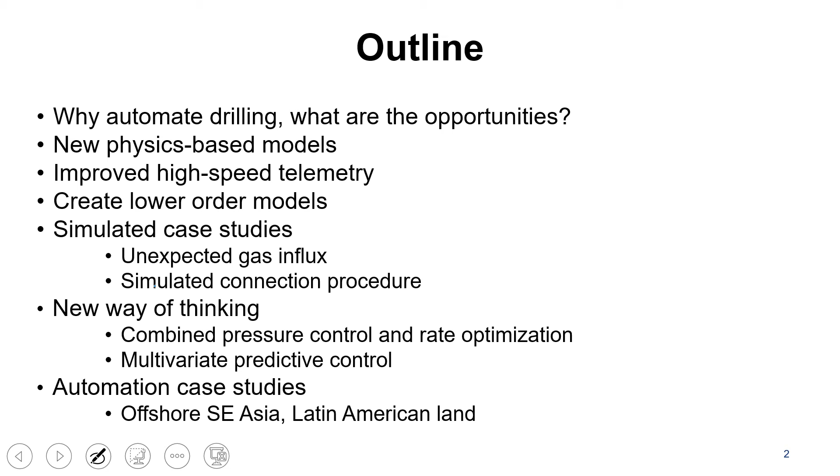So first of all, why automate drilling? What are the opportunities? We're going to talk about some new physics-based models and also improved high-speed telemetry, such as wired drill pipe or other methods to access downhole data. We're also going to review lower-order models and some progress there, since sometimes the large models can't be used directly. We'll go over a couple of simulation studies and then talk about a new way of thinking, combining pressure control and rate optimization. We'll also talk about multivariate predictive control, a more advanced topic, and then a couple of automation case studies: offshore Southeast Asia and Latin American land.

So first of all, why automate drilling? The benefits of automating drilling are, first of all, health, safety, and environment: faster response to problems. You take a light touch versus a major response, such as closing in the well when there's a big problem like a gas influx. There are economic benefits as well—you can operate closer to constraints, and there's shorter drilling time, especially with challenging market conditions that currently exist. We have an opportunity to drill faster.

The other reason this continues to be a problem, even after the BP Macondo well blowout, is that there continue to be about an average of 4 uncontrolled well situations in the Gulf of Mexico each year, as reported in these studies. So we're still having some of those same issues—maybe not quite the same results—but some of these uncontrolled well situations are still happening.

We also want to talk about the benefits of advanced control—having computers adjust valve positions, pumps, and chokes.

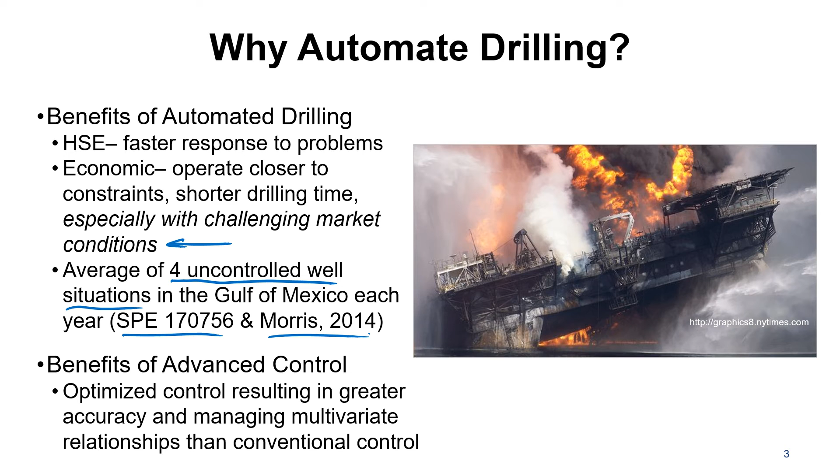Okay, so first of all, what are the opportunities? What's changed in the last couple of years? I'll suggest 3 things that have changed. The first one is high fidelity modeling, indicated by one thing coming into this funnel. We have some very good wellbore hydraulic models and also drillstring dynamic models that have been developed over the last few years and validated with drilling data.

The next is optimization algorithms—being able to solve these models faster and optimize them. With some of the optimization benchmarks, we've seen that problems we could solve 15 years ago, we can now solve 1,000,000 times faster, due to software and hardware improvements.

The third thing we're going to talk about is high-speed drill string telemetry, the ability to measure what's actually going on downhole. We can do that with wired drill pipe, and also with advancements in sensors that are placed downhole.

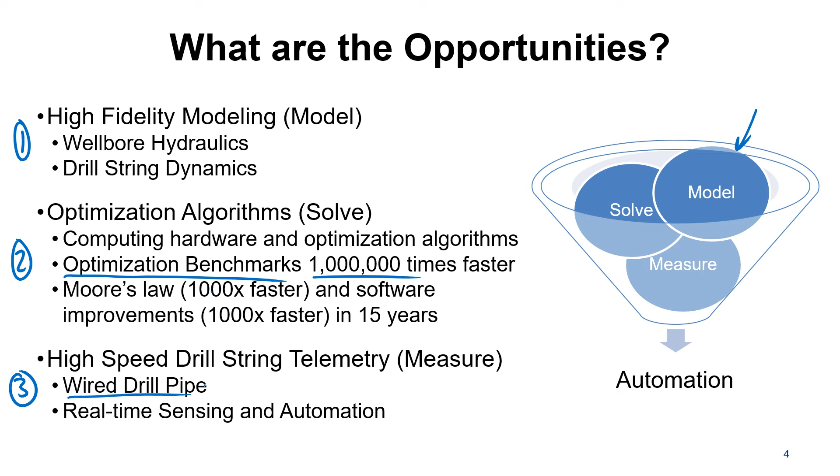Okay, so first of all, the need for physics-based models. There are a lot of reasons why you might want to develop or employ physics-based models in your organization—everything from planning to training scenarios, operations, or after-action review. What we're going to be talking about here is more in the center: well control and rate of penetration, being able to control pressure and also maximize rate of penetration.

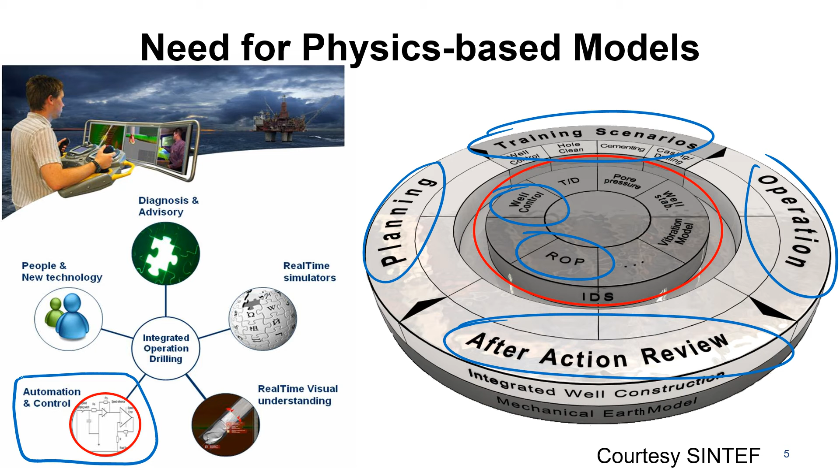Okay, so automation and control is one of the reasons for doing this. And although I'm focusing on this today, there are many other reasons why you'd want to have a fit-for-purpose simulator for drilling operations. So let's talk about advances in some of these physics-based models.

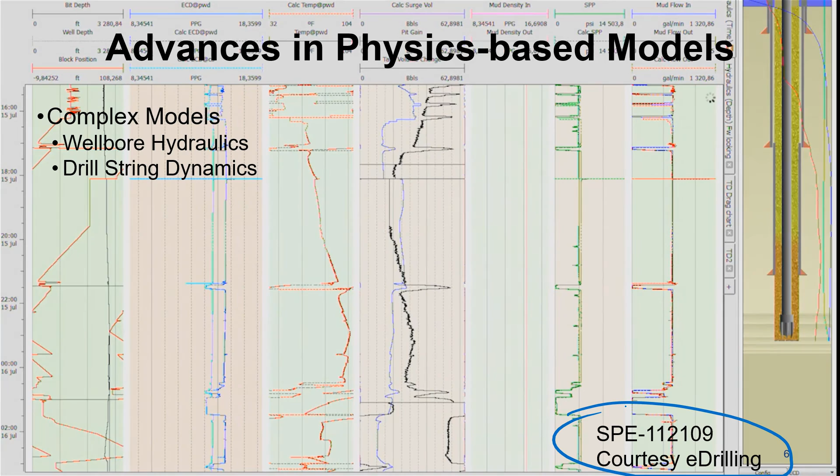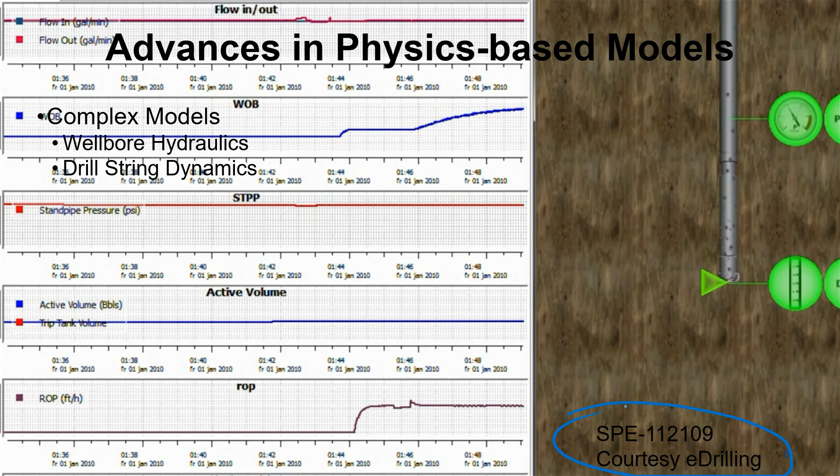Many of the advances have happened with complex models in wellbore hydraulics and drill string dynamics. There's a publication here you can look to for further information. But basically, the bottom line is, if we can reproduce a lot of these drilling scenarios with simulators, those who have spent a lot of time drilling agree that the fidelity of the simulators is getting better.

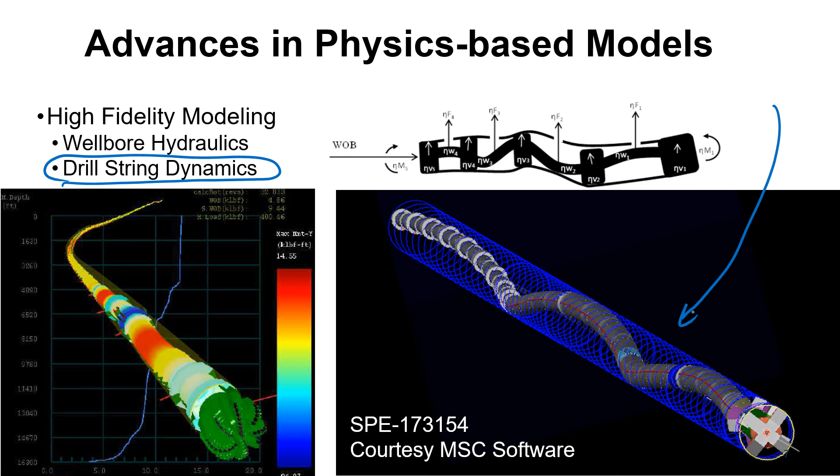We also have drill string dynamic models as well, so this slide highlights that. You can see a stiff string right here, where there's interaction between the string and the wellbore. You can see some backward whirl developing here in simulation as it proceeds. So we can simulate some of these vibration modes that happen in practice, like whirl or other types of events.

Okay, so simulators have advanced quite a bit in the last couple of years, but sometimes the simulators don't exactly represent what's happening downhole, and so there are many times where we need to, or want to, measure what's happening downhole.

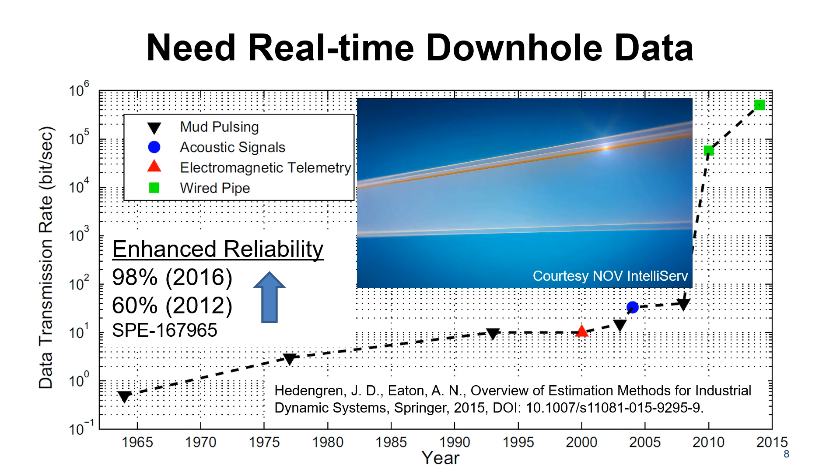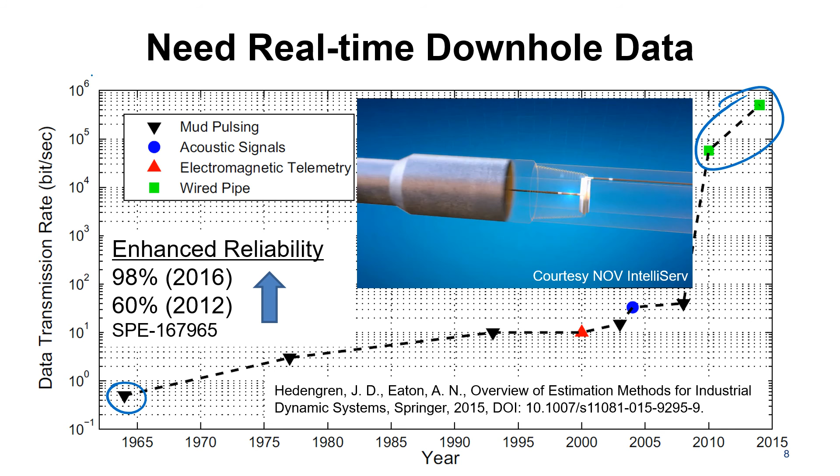That's where wired drill pipe and its advances have come in. We can see wired drill pipe is up here in terms of data transmission rates, on a log scale. Mud pulse technology has improved over the years through data compression and other things, along with electromagnetic telemetry and acoustic signals. It's really just been within the last couple of years that there's been this step change, an orders of magnitude improvement in data transmission rates.

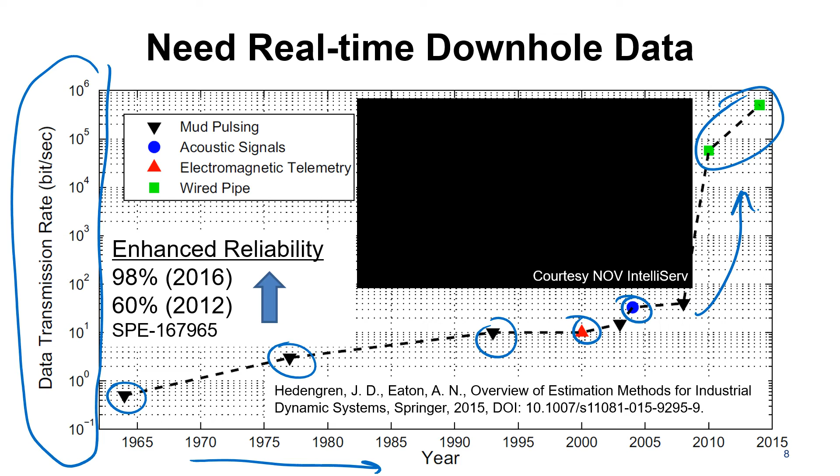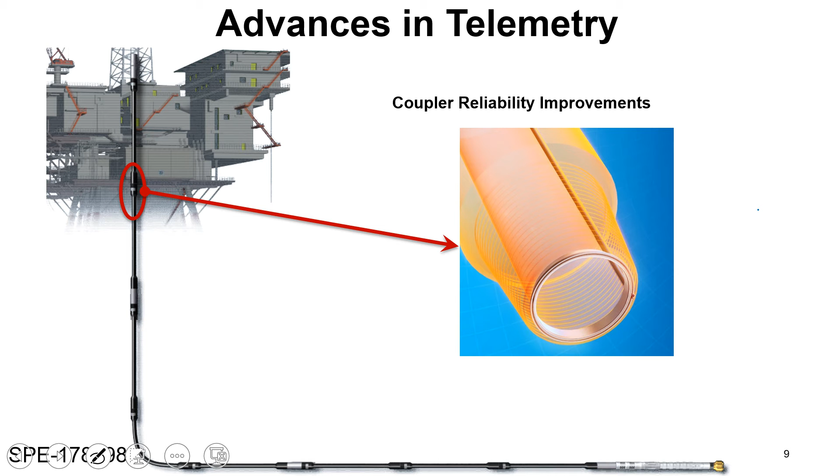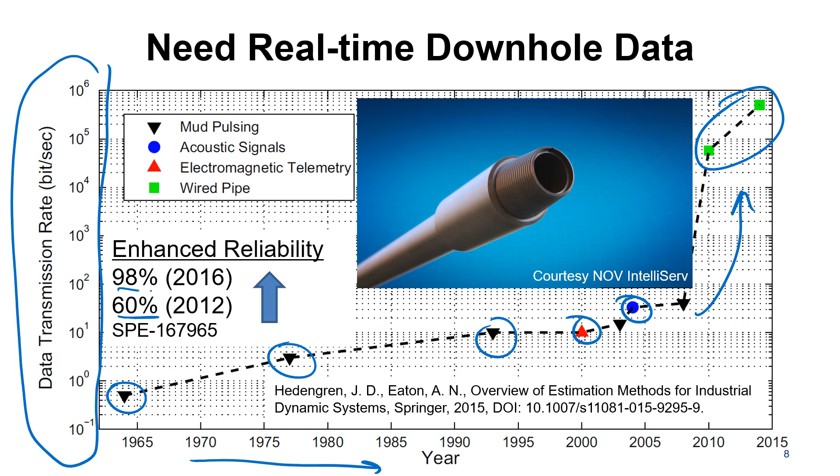So advances in telemetry have brought a lot of improvements in reliability. That was one of the weaknesses before. Going back, in 2012 reliability was about 60%, now it's up to about 98%. Some of the improvements there are coupler reliability improvements, like resistance to things such as stress crack corrosion and others.

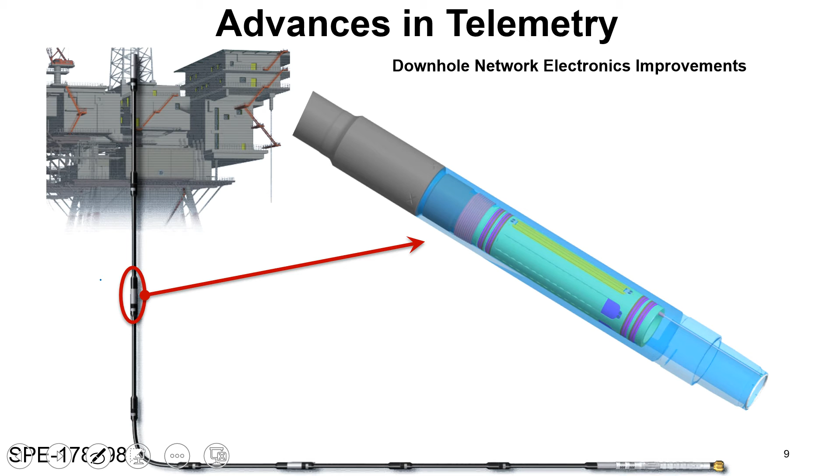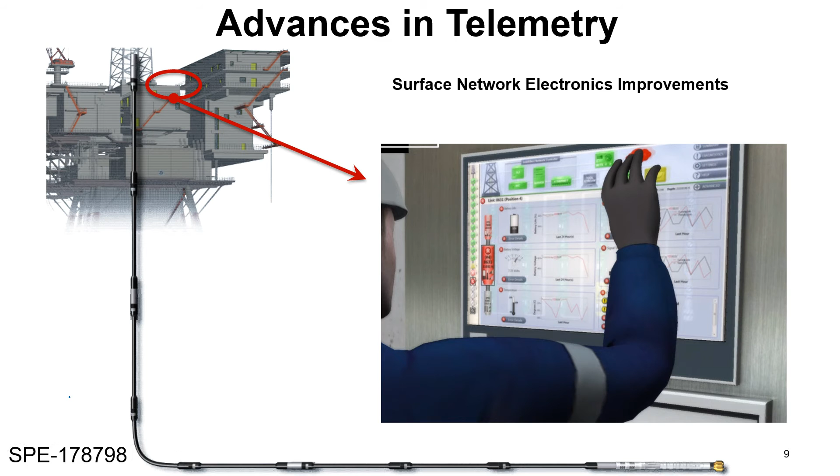There have been improvements in downhole network electronics, including the ability to self-diagnose where the problem is and identify the section that's bad. There are also surface network electronics improvements, interfaces with tools and the ability to transmit that data. These are some of the advances that have taken place, and a little more information is here if you're interested.

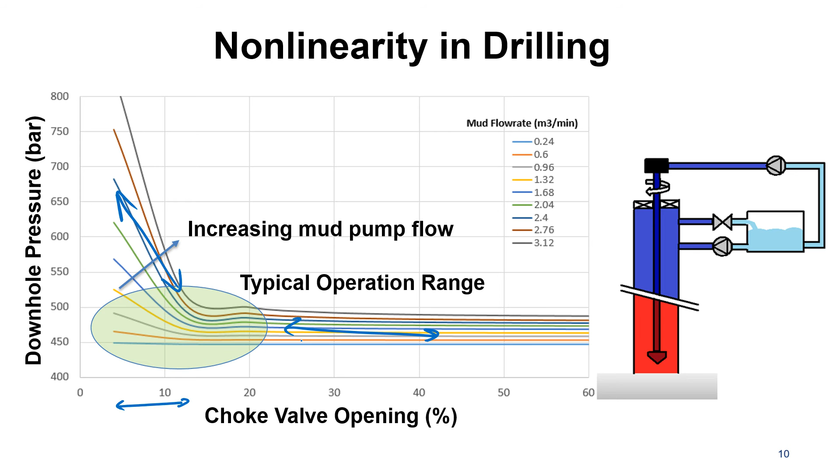Nonlinearity in drilling is a big issue. As we talk about managed pressure drilling, you can see that a very small change in choke valve in this region has a very large effect. The slope is very steep here, but it doesn't have a lot of effect in this other region. When the valve is nearly closed, we have this very strong effect, so very small changes in the valve are going to have a big effect on the downhole pressure. It's very nonlinear, and this is part of what makes it very challenging.

So we have these high fidelity models and this data transmission, but the data or the models aren't really going to do us a lot of good in real-time drilling unless we can use them. This highlights the need for lower order models that can solve fast and reliably, and that are going to be able to track most of the things we're interested in with the hydraulics and drill string dynamics.

In managed pressure drilling, these are the things we can typically change: the pumps and the chokes. We also have a back pressure pump. Then the things we're trying to maintain at certain levels are bottom hole pressure, annular pressures, and the choke valve pressure.

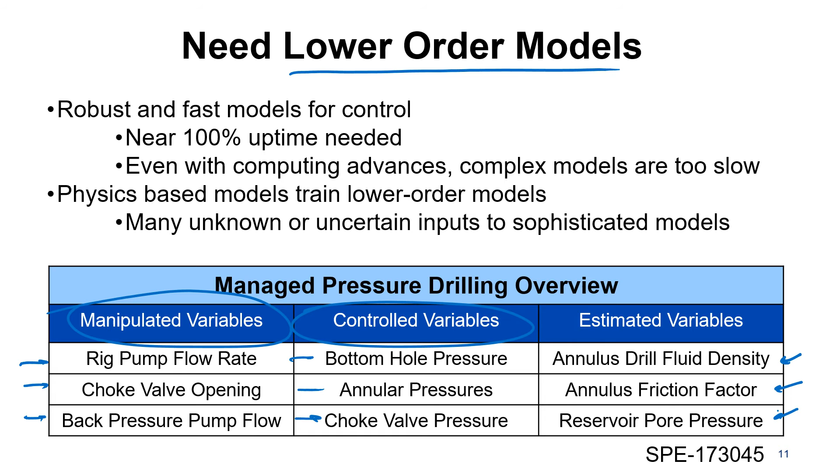The things we don't necessarily know are things like the fluid density, since sometimes we can't measure that directly. The annulus friction factor also relates to how much pressure drop you have as you flow, and non-Newtonian fluids can also affect that. There's also reservoir pore pressure, especially if you're trying to match a reservoir pore pressure in managed pressure drilling.

So we want to be able to match these physics-based models, these really fundamental models with a lot of equations, with lower order models that might only have 7 equations or so. Now here are some simulations that show changes in the choke valve pressure and also the mud pump pressure.

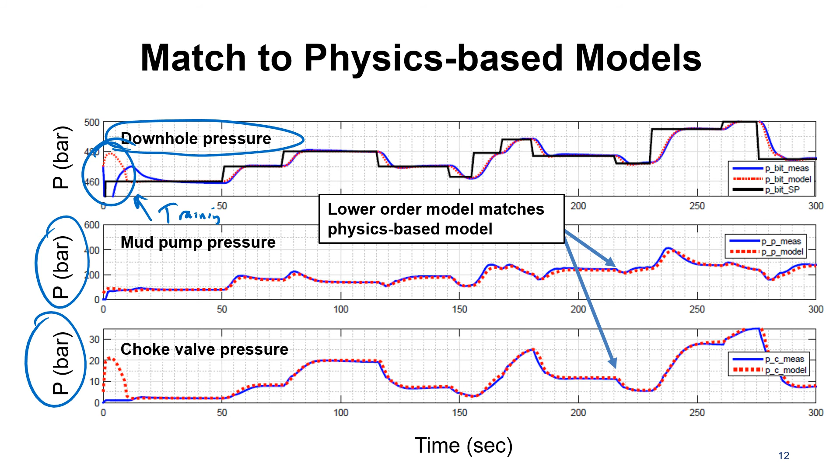As the mud pump increases or decreases, or the choke valve opens or closes, we see how that's going to affect the downhole pressure. There's an excellent match here as we train these in the beginning, like a training period, over the first few seconds as we receive this data. We match these to the high fidelity, physics-based models, so these lower order models are fast, reliable, and can solve in real time.

We can think about how to implement these. One way is with a conventional feedback controller, and I'd like to make an analogy here: it's kind of like driving your car looking backwards. You're responding to disturbances as they come. Let's say you notice that you're starting to veer off the road, so you respond.

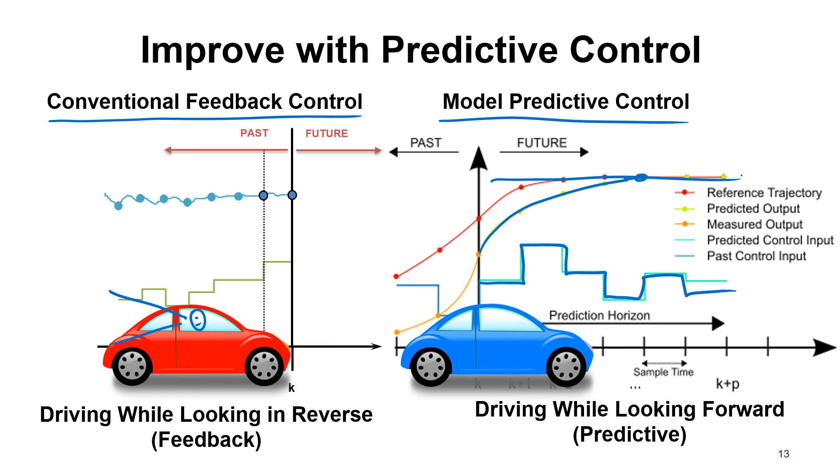In predictive control, you use models to ask: if I do something now, how will that affect me 1 minute, 10 minutes, 30 minutes from now? It plans a path for your chokes and pumps into the future to get you to a desired state, like a desired pressure. So that's like looking forward while you're driving.

Let's do a quick comparison with conventional control. This is the looking-backwards approach, using only the choke opening. We want different pressures at the bottom hole while maintaining a constant mud pump rate. Due to nonlinearities, the valve is opening and shutting quite a bit—some pretty aggressive action on the choke to try to meet those set points.

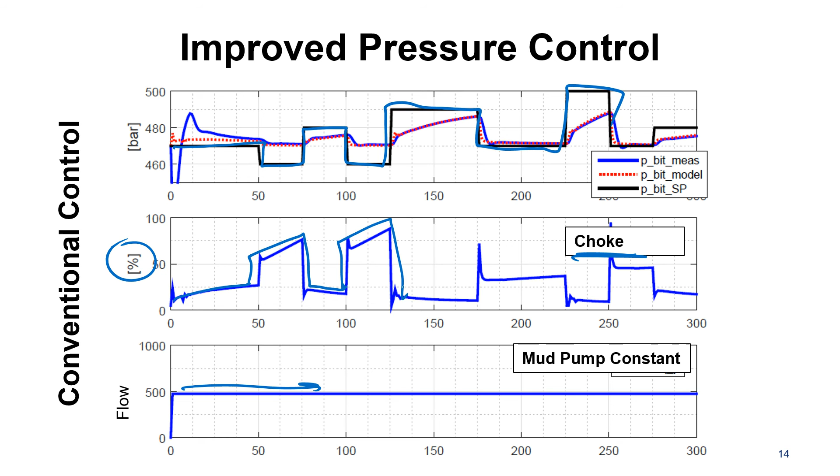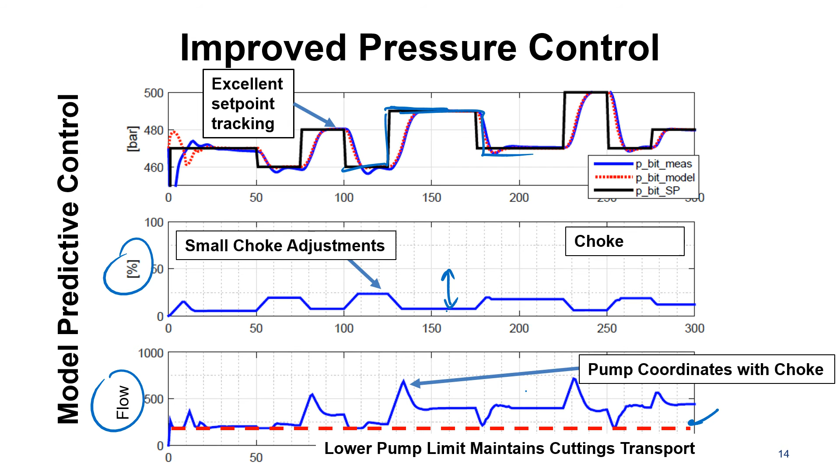Now here's another example. Let me erase these. If we use predictive control, we can use both the pumps and chokes in a coordinated fashion to help us reach the desired levels faster and stay on target better. We can put in constraints, like not wanting the mud pump to go below a certain amount, maybe for cuttings loading issues. You can see much less movement in the choke because we're coordinating the actions with the pump.

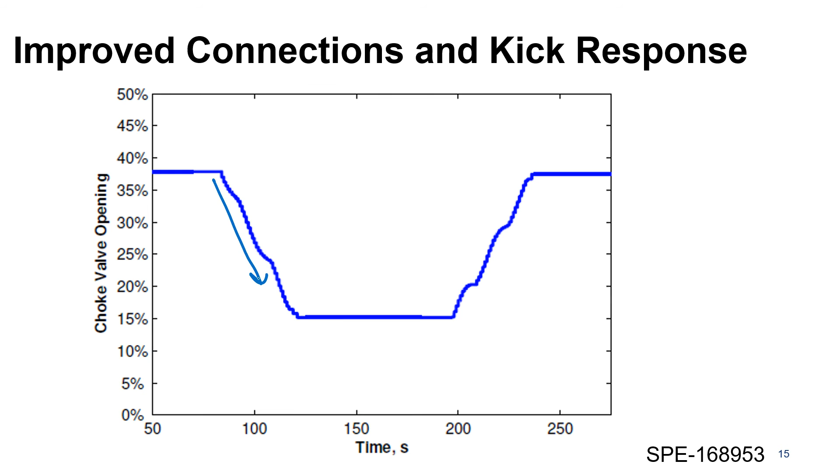So we have improved connections and kick response. This shows a pipe connection procedure: we ramp down the pumps and the choke, turn on the back pressure pump, and you can see it's coordinated with this back pressure pump—so there's always flow going through the choke valve.

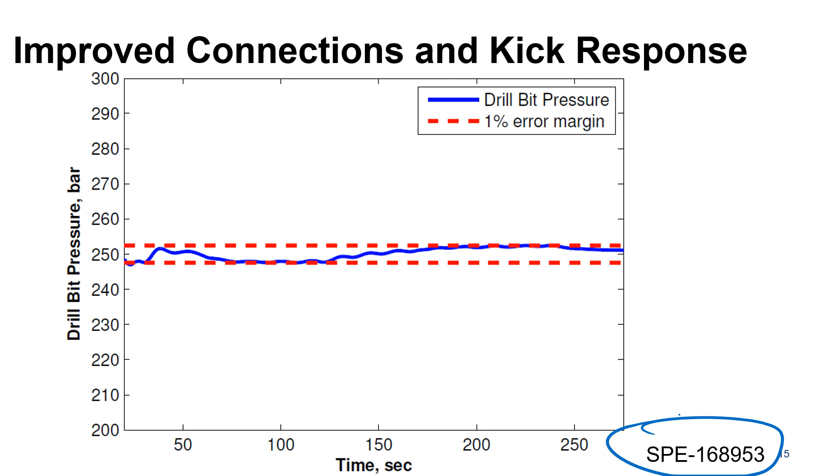We also get excellent pressure control. Now this is all in simulation—I'll show some results where this is actually applied in the field. But in simulation, we can maintain plus or minus 1% on our pressure. There's additional information available if you'd like to see that.

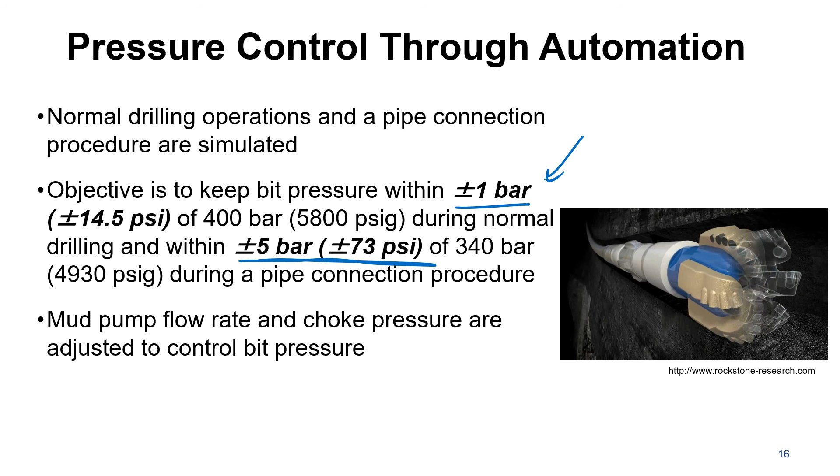We have objectives of trying to maintain within plus or minus 1 bar during normal drilling operations, and typically within plus or minus 5 bar during pipe connection procedures. This depends on the objectives of the well and other factors, but these are our typical targets for pressure control while drilling with MPD.

Now I want to talk about a new way of thinking. We've discussed pressure control—some of these ideas are fairly standard, where we want to anticipate changes coming. I'm going to introduce a new way of thinking about these things that's quite different from how it's currently done. Consider, for example, pressure control and rate of penetration maximization.

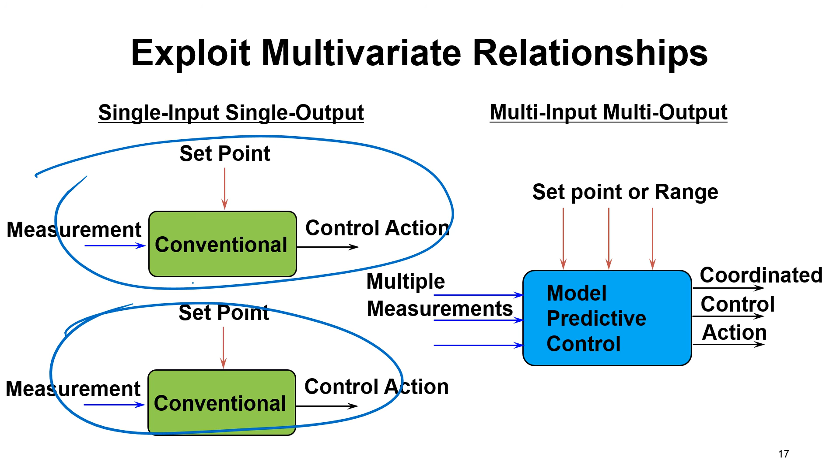We always want to try to maximize the rate of penetration up to allowable levels. Currently, these are separate applications—we maintain pressure control with the chokes and pumps, and we maintain rate of penetration with weight on bit and RPM, the rotation rate of the drill string. Now what happens if we combine those two into a single application? Let's see what happens.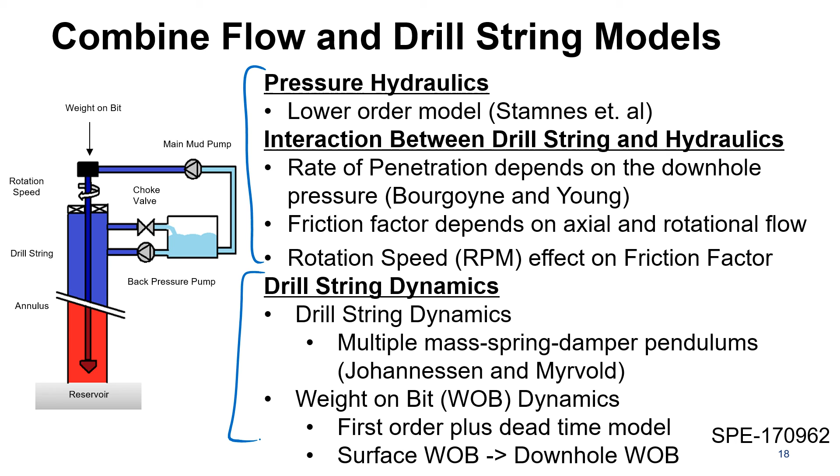First, we have to combine these models together. There's been a lot of work done on drill string hydraulics and also drill string dynamics, and their effect on rate of penetration. Again, there's additional information available there.

Consider automated kick response: you're drilling MPD, you enter a region with higher pore pressure, and you start to receive a gas influx. The former way of handling this is shown in black—a manual response, catching the kick after a period of minutes or hours once you notice a pit gain or similar, then responding by closing the choke and increasing the pump rate to circulate out the kick. With automated controllers, we're able to decrease and improve this response time.

In red, we show this comprehensive controller, combining the two controllers together. We can do that because rotation rate has a big effect on pressure as well.

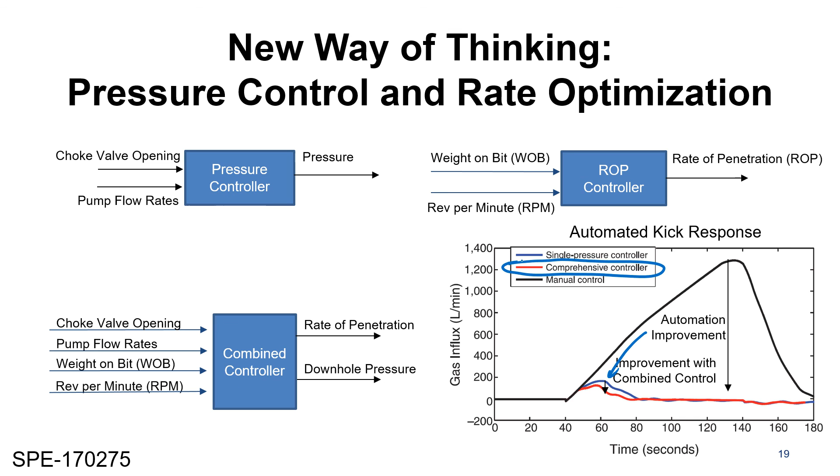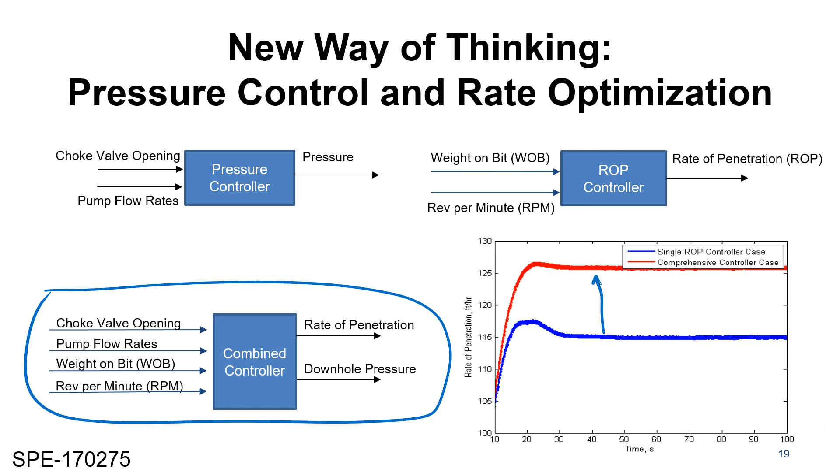So simultaneously, while trying to minimize this kick, you are increasing the rotation rate and decreasing weight on bit, maintaining rate of penetration, but also using those two to respond to the kick. This is a new way of thinking about pressure control and rate of penetration in a coordinated way that uses these models. We also notice that if we do this, we can lower the pressure right at the bit to the allowable limit, which helps us achieve a higher rate of penetration. So the pressure and rate of penetration control are connected.

One of the challenges of automation is that it can become unreliable if the control model is not calibrated or is not sufficiently accurate. This is a known issue: model accuracy, controller stability. There have been recent developments in this area as well that have addressed these issues, especially with ensemble models—collections of models you can switch between depending on which one is more accurate or reliable.

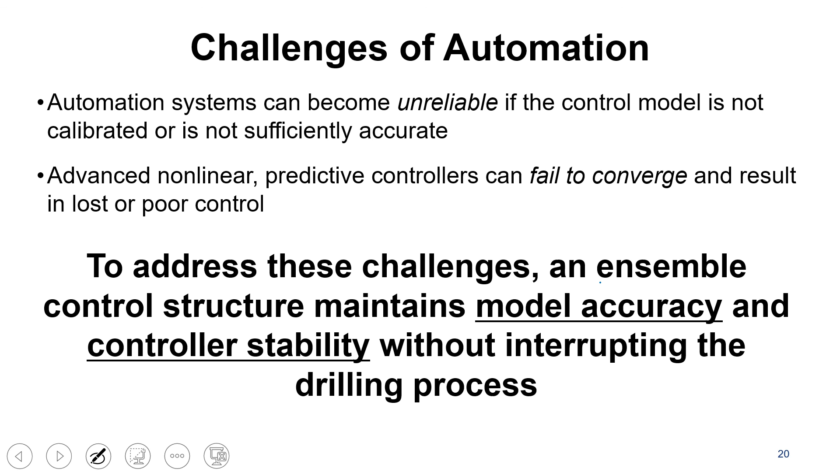So let's talk about closing the loop now, where some of this is applied in practice. Here's an offshore Southeast Asia drilling ship. There's a shallow, high-pressure gas-bearing sand, which required a very fast kick control response. They knew it was going to be an issue, and without managed pressure drilling, this may not have been possible.

We wanted to meet some of the targets mentioned before: plus or minus 1 bar during drilling, and plus or minus 3 bar during connections, and also be able to monitor when the mud was not flowing—something not possible with mud pulse telemetry. So the solution was managed pressure drilling and a control system with wired drill pipe, and these targets were met.

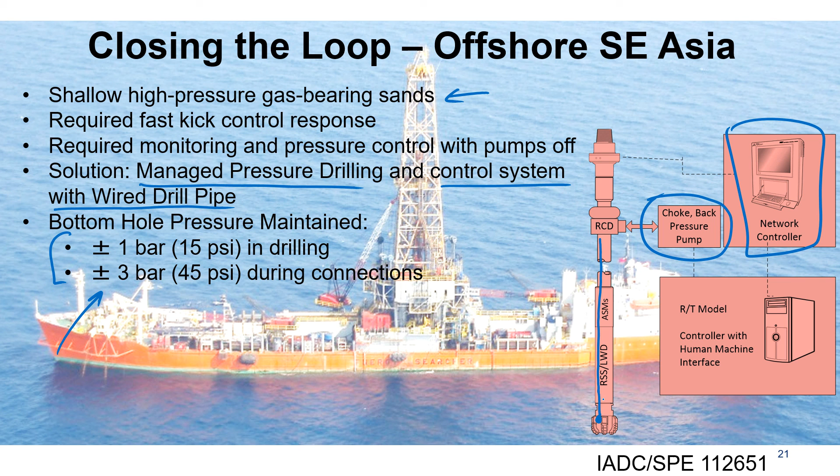You can see a schematic here of how this was configured. You were changing the choke and the back pressure pump. You had a network controller, and then the wired drill pipe, which senses at the bottom with a pressure sensor what's happening in real time with high speed data transmission. A little bit of additional information is right there.

Another example is closing the loop in Latin America on land. This was a severely depleted reservoir with formation fluid influx in upper well sections, and there were wellbore stability problems. This required consistent monitoring and control of bottom hole pressure at all times, including when the pump was off. Again, the solution was managed pressure drilling and wired drill pipe, and it was completed successfully with a very similar setup as before.

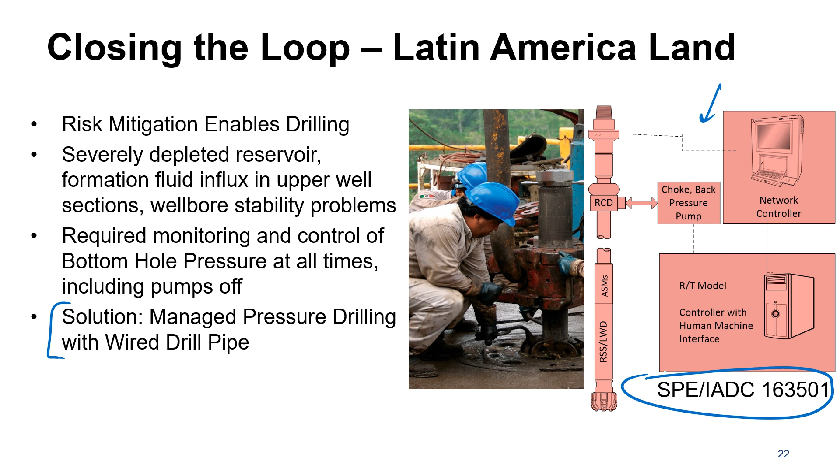A little bit of additional information is given in this publication.

Just to cover a couple of the main points of this presentation: automation creates value with high speed and two-way communication. We have predictive controllers where we started with high fidelity, very accurate models, but in order to compute them in real time during real drilling operations, we've had to use lower order models that are trained by the high fidelity, physics-based models.

One of the needs I'll highlight is that MPD service providers and clients need fit-for-purpose modeling. There are a lot of models out there. We need models that can be used during drilling operations to give real-time advisory to either the driller or to computer systems that will automatically adjust the chokes and the pumps.

The next generation automation solutions—the trend we see in industry—are being built upon systems that include telemetry of some sort, real-time data, and predictive models as advisory tools, with the goal of moving toward full automation. Although there are many obstacles and challenges, in talking to different companies and researchers, there's a common goal here, and the industry is definitely moving in this direction, although several very daunting challenges remain, requiring further development.